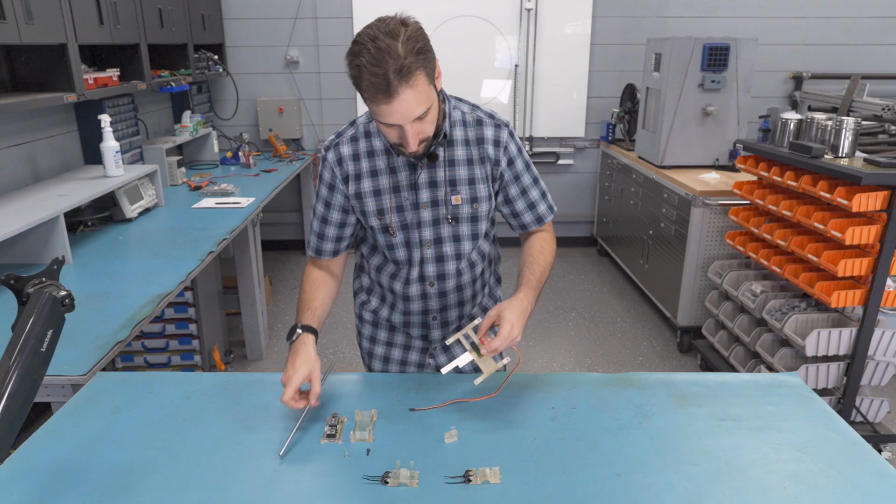I've got some mount blocks and everything that I'm going to put those on with. And then let's see if I can fit all this together without screws so far. This is going to hold some rail that we've still got to cut and put in there. And then on that rail, I've got linear bearings. And I don't know how well you can see it, but I've got a little rack for this gear to go up and down against.

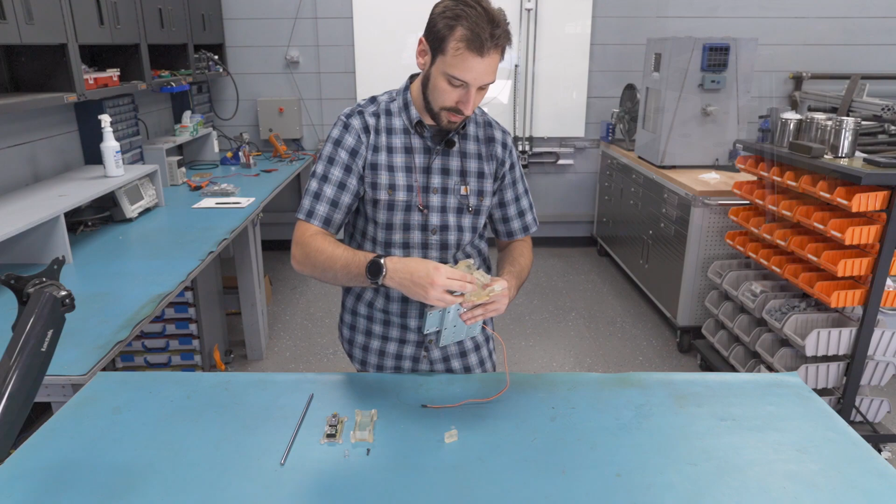So this will push and pull this element, which interacts with this right down here. Let's see if I can hold all this together. This element down here is actually going to be what holds the pen or the marker. And I'm just going to move this because I can't hold it all at the same time. But you can see this element is going to go up and down on rails, and it'll pull the marker up when I want to pull it up.

And when it goes down, the hard linkage here is going to let the whole thing go down, but it will push it through springs that are going to go between the elements there. And that should allow me to apply some pressure to the pen, but it's going to ride on the surface. And so this might end up being a bit over-engineered, but it's really fun and I can't resist. So we're going to give it a go.

Either way, it's going to be a lot more deterministic and powerful than what we had, and therefore a lot easier to control in the software. Speaking of controlling this thing, our motion controller is going to be based on 24 volts because that's industrial standard stuff. However, this hobby DC servo right here is expecting something like 5-6 volts to drive it.

So what I've got to do is take that 24 volts from the box and convert it down to 5 volts, and then I'm just going to run that into a little Arduino and then use the Arduino to take a 24 volt signal through an opto-isolator, if you know what that is.

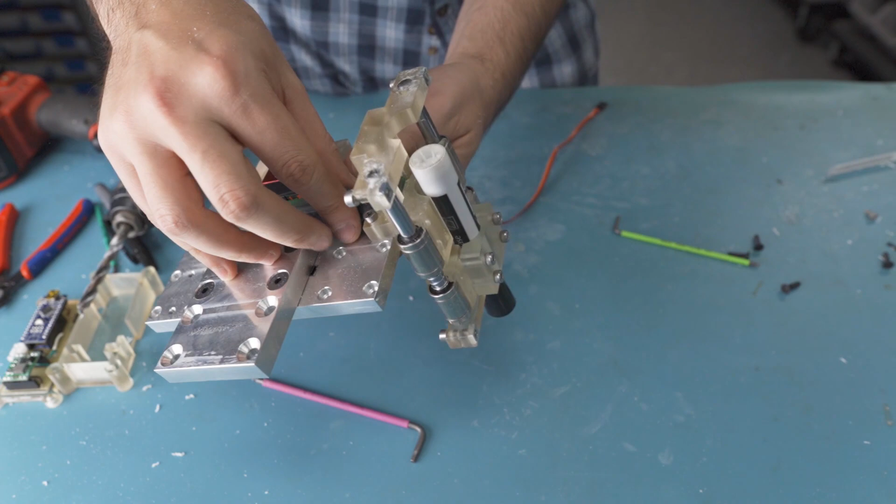All right, after a bit of finaglery, all of this is together and fits reasonably well. The only real problem I had was with the bracket, I guess I'll call it, the main structure of this assembly. The hole placement, I was trusting the 3D printer a bit much, and it didn't really work. It wasn't holding the bars parallel with each other and a couple other issues like that.

So what I ended up having to do is drill these out and make them just too big so they can move around. I got everything lined up, held everything all at the same time, and then I packed it in with a little bit of the shavings from the plastic and then filled it with super glue. So sometimes these are the things you got to do when you're prototyping. But now I got them all parallel and everything, and that works.

So yeah. At some point, I definitely want to get a better printer, one that doesn't bleed the way that the UV cure resin is exposed, lets it bleed out, and the longer it's exposed, it gets a little bit bigger, and yeah, that kind of screws with your tolerances a bit.

But anyway, now that everything's working, sanded so that it fits together right, we're ready to go ahead and test it. So right now what I have it set up with is just the power supply here is going to give us 24 volts. That's going to power the Arduino and everything in here. And here's my signal. So I'll just touch the signal to the 24 volt supply, which will give us the digital input as a simulation from what we'll get from the main controller.

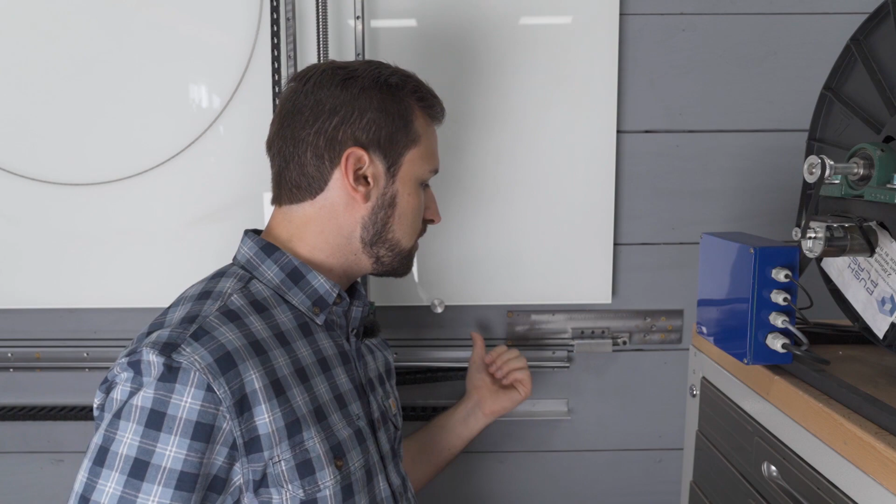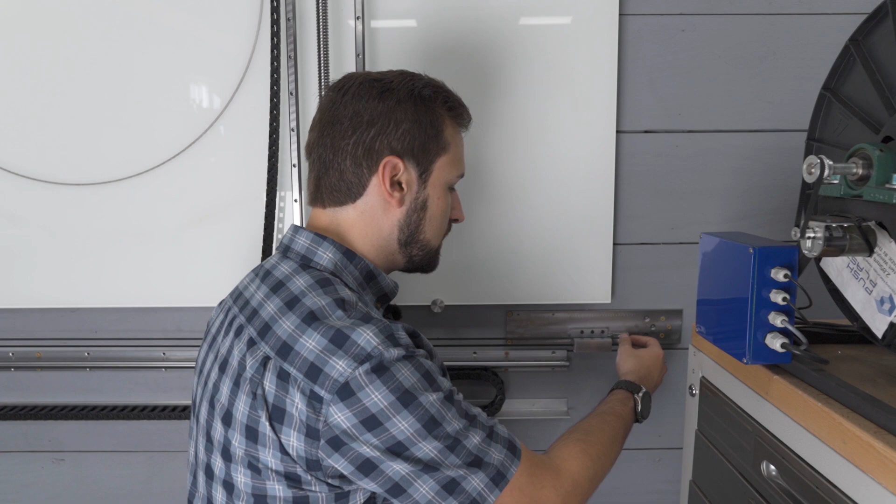As a bit of review, this guy here, I designed this whole assembly, and it serves three purposes. It's of course the opposite side of the belt to keep it straight. It's an end stop for the carriage, and it also tensions the entire belt. And because it's trying to do so many things, I've run into some issues, which, you know, I was kind of asking for. So this here, let me see if I can push it in and out and you can see.

This one's the worst one. I had the worst tolerances on this one when I was cutting it on the mill, and you can see that it doesn't actually hold this straight. It pops out because there's so much tension on this belt. Through this little lever arm, it's going to pull this around.

The issue with that is that you can actually use somewhat off-angled pulleys to drive a belt left or right. Normally, like in a belt sander, you use that to center the belt. Well, here, because it's just off-angle by a degree or two, it's causing that belt to run right into the wall. I don't know if you can see this very well, but it's trying to ride up that wall and giving me very uneven and unpredictable resistance to rolling, which isn't a lot of problems that the servo motor could punch right through.

But the issue is these servo motors, they auto-tune. They automatically try to throw the carriage back and forth to get a feel for how the axis is, and the auto-tuning algorithm just cannot handle that kind of non-linearity, because the faster it goes, the more this issue arises, and it's a very strange dynamic that it's not expecting.

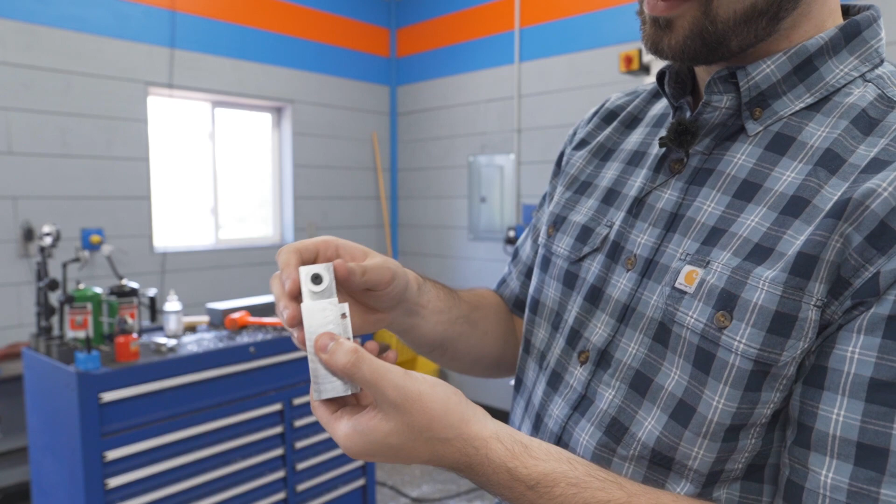Okay, so in case it didn't make sense while it was on the wall, here's the part we're looking at. From the side that we saw, this is the belt tensioner here. From the view inside the wall, you can see that this piece just fits into a slot that I milled out. So this really isn't important. This is the piece we want to fix really quick.

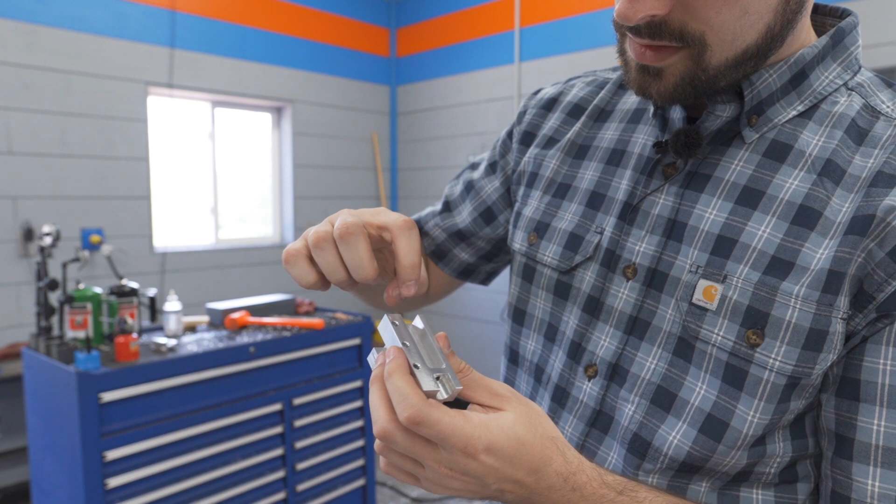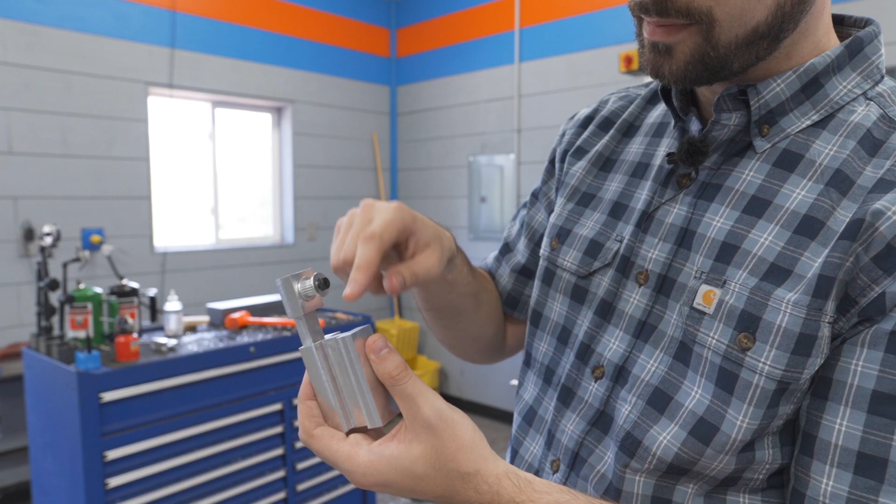I'm thinking of just adding a little screw right here. So that'll press into the shank, whatever you want to call it, and just keep it pressed against the wall. So that's all we're really doing. I'll go ahead and get this in the vise, and we'll move on with that.

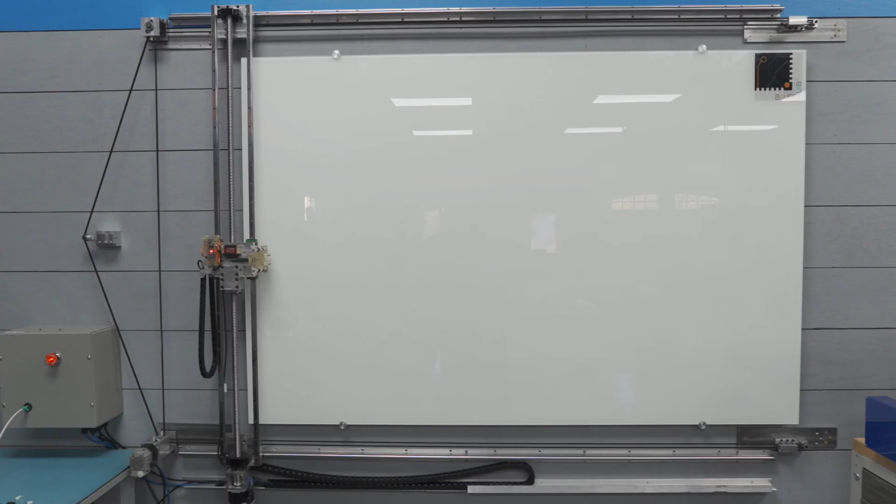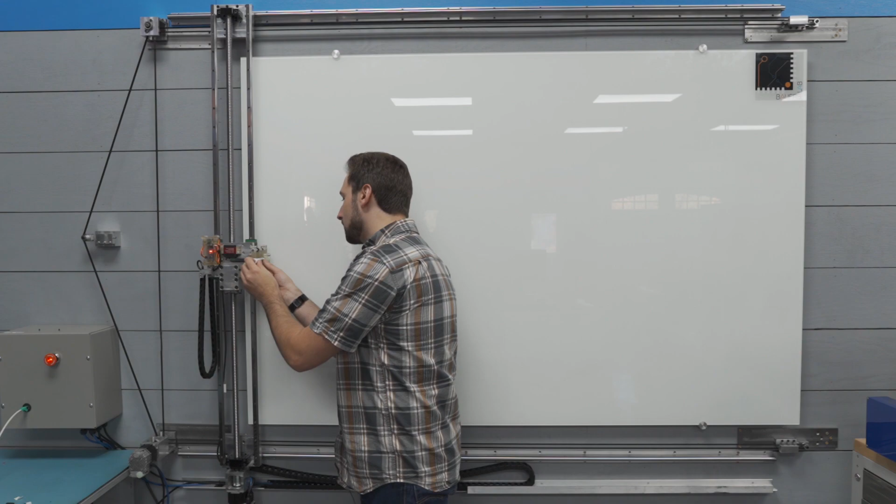Okay, so it's all ready to go now, except that the marker is not in there yet. To put the marker in, I activate the marker pressed down bit. That pushes everything down towards the whiteboard, at which point I can take the marker, place it in the holder until it touches the whiteboard. And what I'm going to do is press up against the spring, and then, hold on, I need my, there it is. I press up against the spring and tighten it down. Now we should be good to run it.

Yeah, so you can see that wobble I was talking about. I don't think I'm going to be able to stand that for very long without getting a gearbox, so we'll see how that goes. But as far as this test goes, I've got a bit of text up above here, a couple of text pieces down here, as well as an isometric view drawing of one of the CAD elements. Actually, it'll be the carriage here. So you'll see that once it's done. Seems like it's chugging along just fine. So we'll go ahead and check up on it when it's further done.

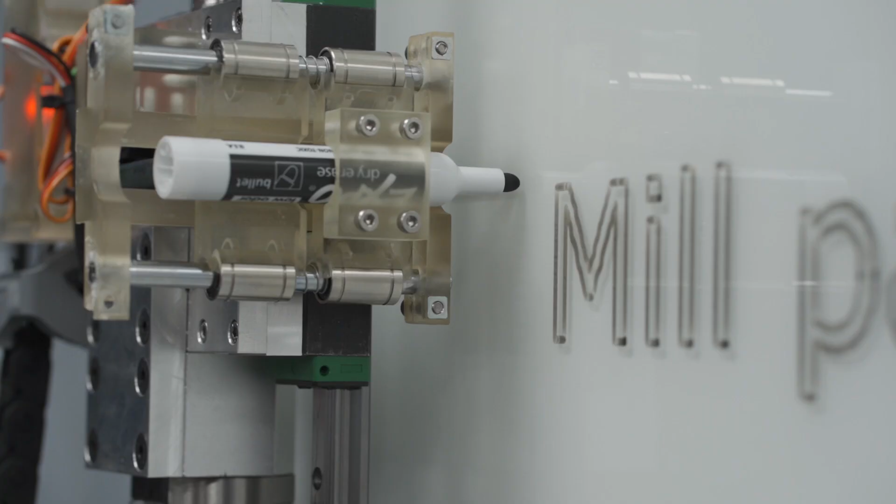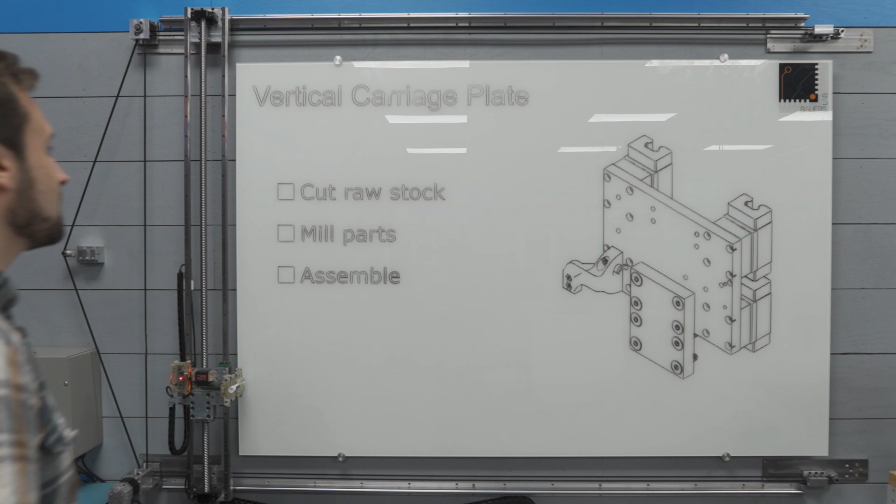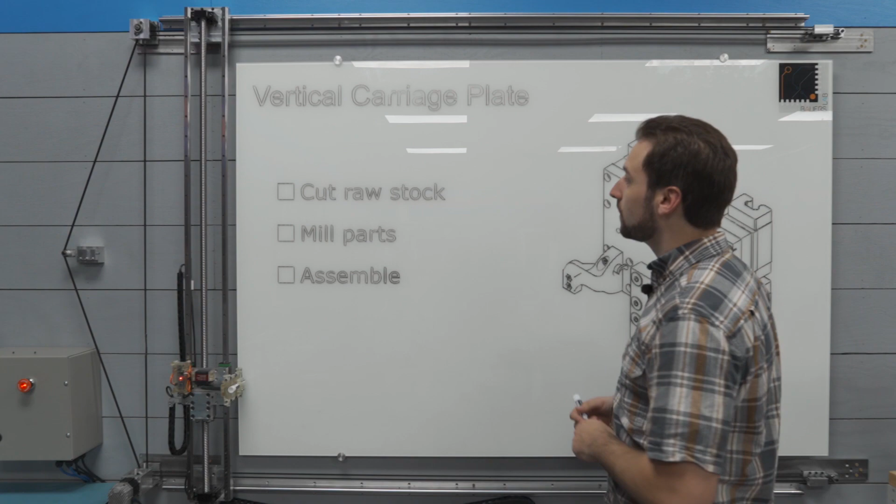Aha, here it is. It's a little bit slow, it's a little bit wobbly, but it did it. I mean, here's basically my first use case. If you remember the Skittle sorter back in the day, I was trying to draw some diagrams of the plan, but it was all terrible, and I ended up not using this at all because my writing is not good enough to be very useful. But here, I can draw these nice little check boxes here, so that's pretty cool.

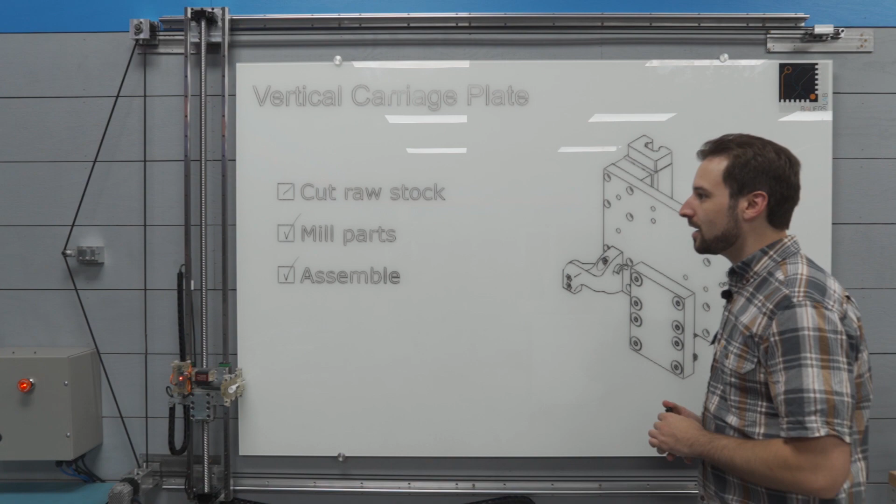So we should have many uses for this in the future. Sometimes we can just make the whiteboard look cool, and sometimes we can use it to create these kind of diagrams, which are a little bit more useful, especially when there's people in the lab here that we want to show stuff to. So in that regard, it's very useful. You can see the wobbly lines. Anytime we do a big XY move at the same time, you can see how the x-axis falling behind becomes a bigger problem because the y-axis has no problem, so it expects the x-axis to be able to follow along, and you get these issues here.

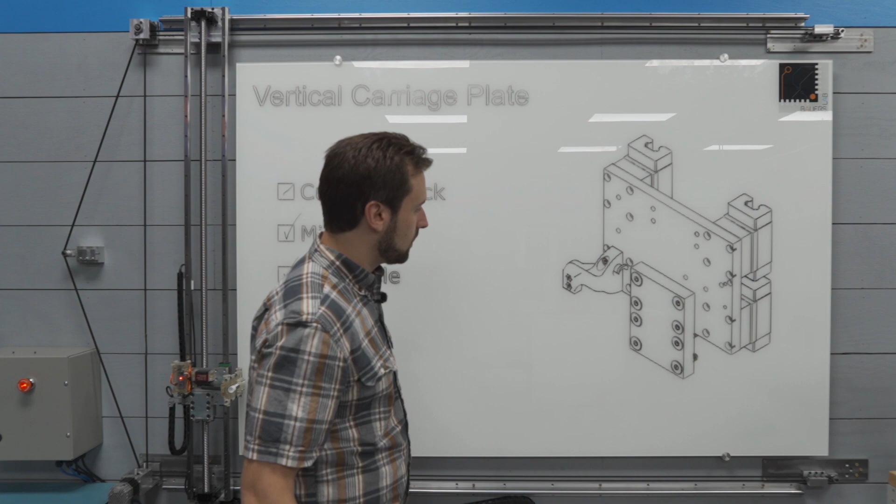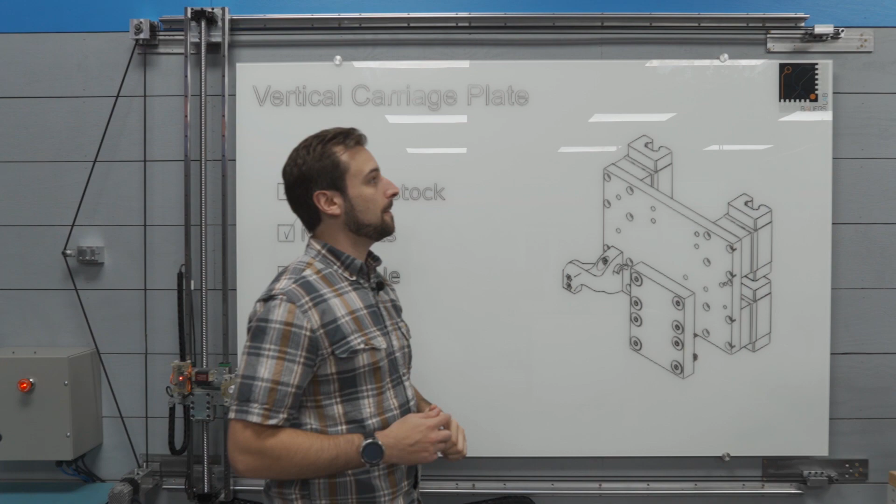If we do put a gearbox in there, that would be greatly cleaned up, and we'd probably be able to go a bit faster. We'd be able to crank up the accelerations and stuff like that. I don't know exactly where the limit is, but the frame, being the wall back here, the wood studs, really is the great limitation of this machine. I kind of thought it would be the belts fundamentally, but the belts seem to be fine.

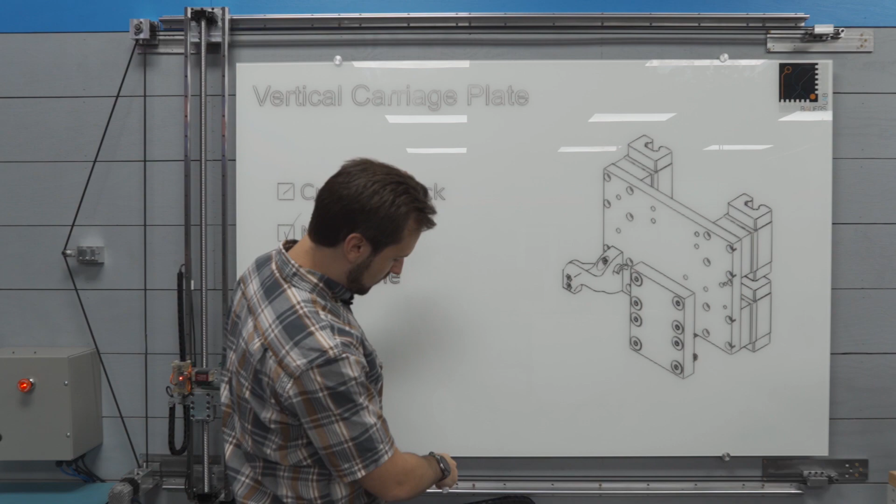It really is the wall behind the belts that's causing the issue, which of course makes perfect sense because they're not going to be rigid at all. So any kind of bending and flexing. I did notice one time I ran the vertical axis up against a hard stop, which if you think about the way that the tension goes, if you push any further into a hard stop, it will essentially create force between these two rails here, and I was able to see the entire wall flex just from the little servo that we have on the axis here.

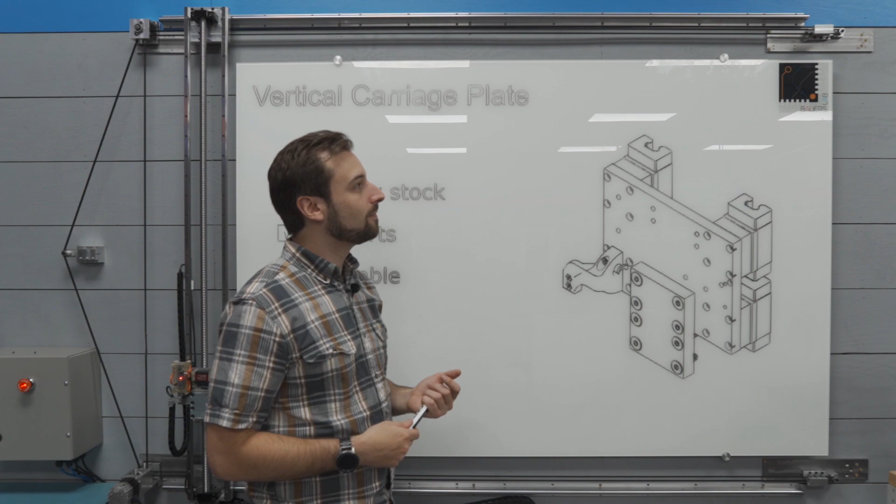So I think that's acceptable given the conditions. I think this draws fast enough that it would be useful to me. I can generate the G code for it and then get it started and just walk away and work on some other stuff while it's drawing. So I'm pretty excited. That's actually pretty cool.

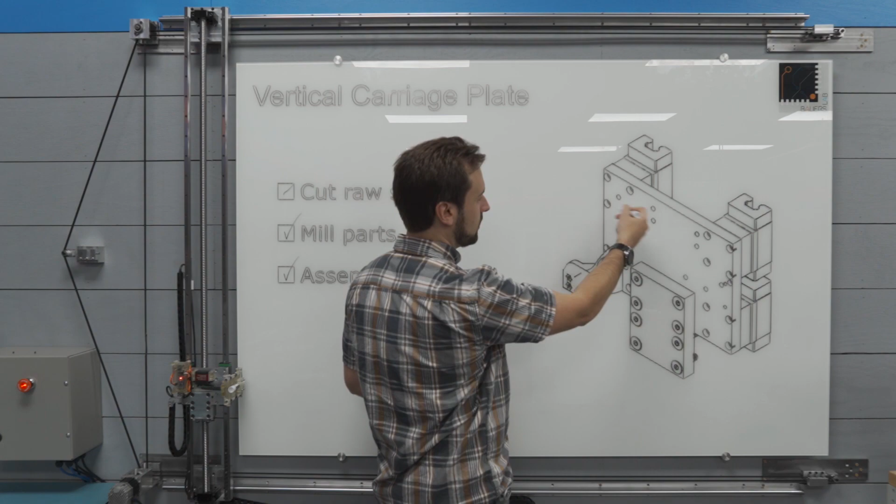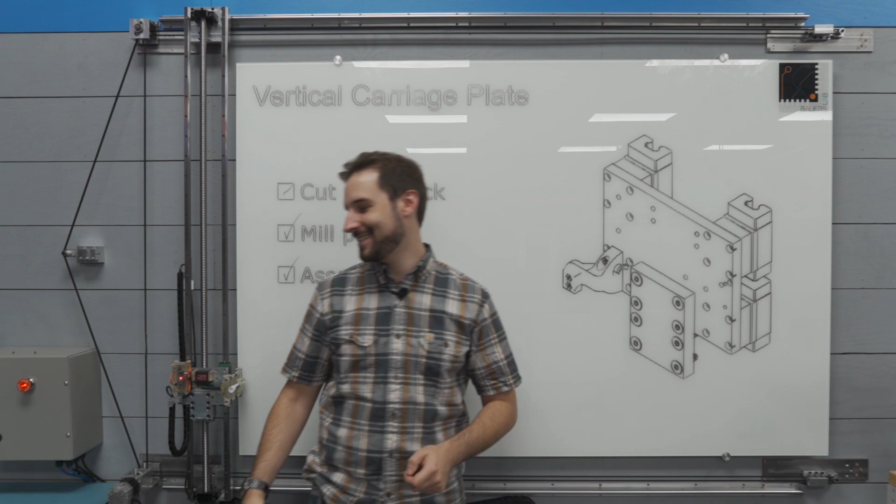I can come up here and actually write on the board about, you know, if this is bad, or... man, my handwriting is bad. Oh no. I can't write even well enough to annotate. Oh yeah, my handwriting is terrible. I forgot. Let me go program the computer. Hold on. I'll be right back. Yeah.

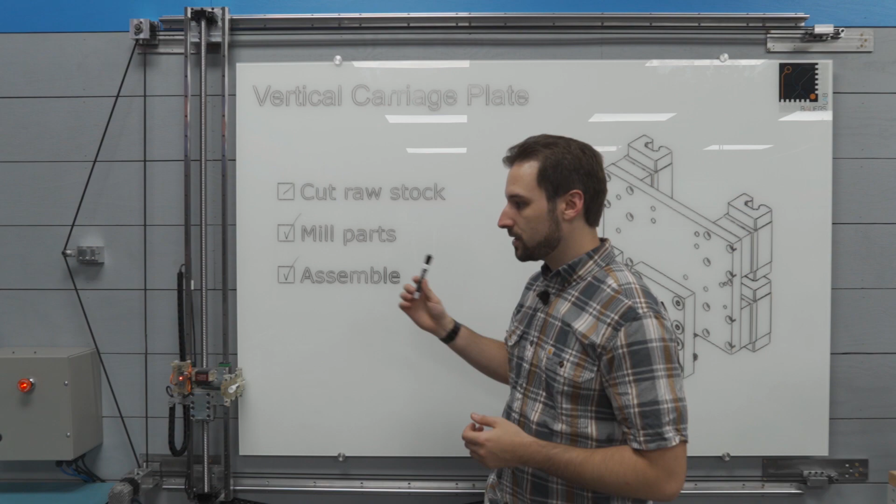And now that we've tested this CNC controller, I'm comfortable with it, and I think it would be good enough to put on the milling machine when we get around to doing the CNC on that. That's half the reason of doing this project, was just to get used to the ClearPath motors plus the CS-Lab CNC controller, the CS Mio, I think it's called. I don't know if they actually pronounce it that way, but that's what it's called. So I like that, and we'll see if we can use that over on the mill later, whenever I get the funding for that.

So this is essentially done, but let's take a look at one more thing before we conclude the video. I want to take a look at how we created the G code for this, because coming into this, I thought that generating G code from drawings was going to be kind of a solved problem by now, but it's not actually as straightforward as I thought it was going to be. So let's go ahead and take a look at that on the computer. I didn't have a ton of time to look into how to do this, so I'm just going to show you what I did, and if you have a better way, then let me know in the comments.

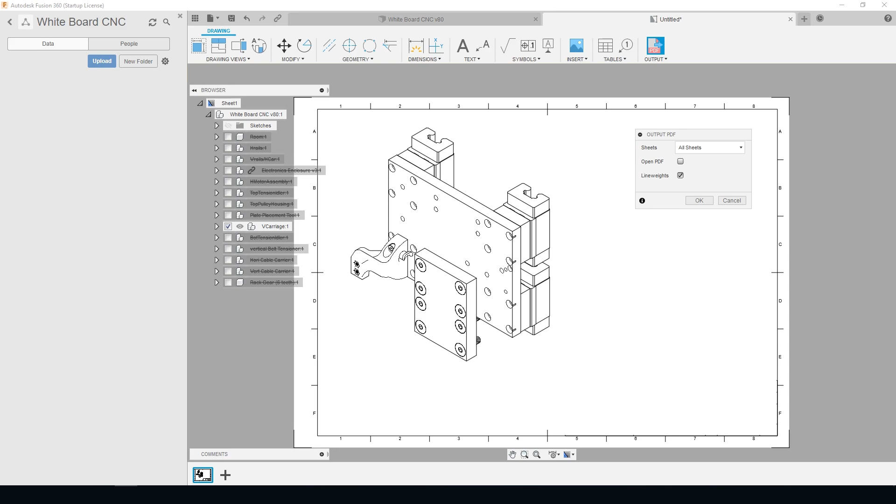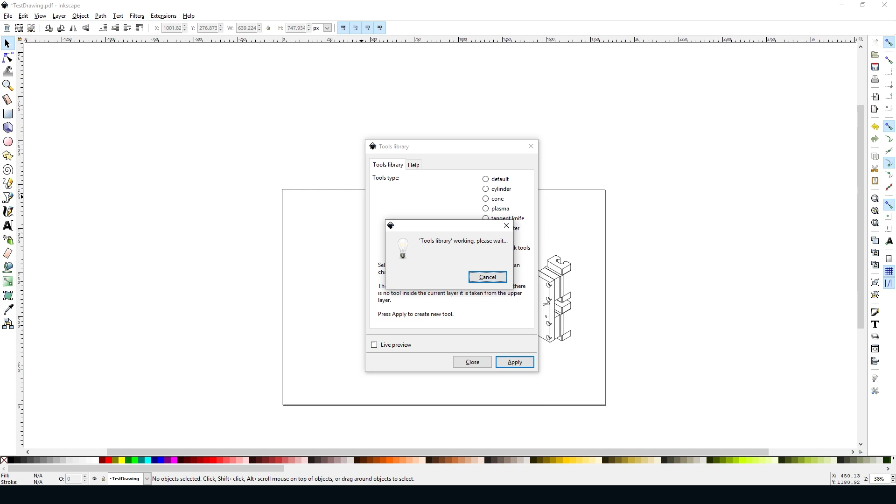The first thing I did was export my Fusion 360 drawing as a PDF, and then this can be brought into Inkscape here. In Inkscape, I'm going to clean up the stuff I don't want, and then set the canvas to the size of the whiteboard so that I kind of have a reference to place the drawing. Put it where I want, and then use the G-Code Tools library here to set up a tool. It's a little weird how it works in here. It makes this little card and then you set the parameters of your tool in this card. It's very strange, but that's how it works, so we'll do that.

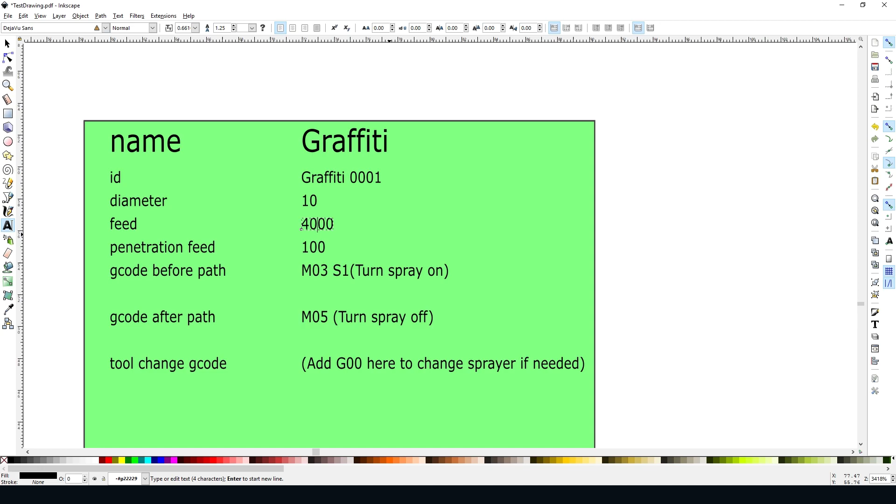Once that is set up, I can use this path to G-code tool here, and that will go ahead and generate the G-code. Now, whether or not this is actually appropriately formatted for your CNC is something you'll have to check out, but this did happen to work for my machine here. So from here, I was going to show you more about the actual CNC control software, but I can see this video is getting pretty long, so I'm going to go ahead and make another video about that and call this one done here.